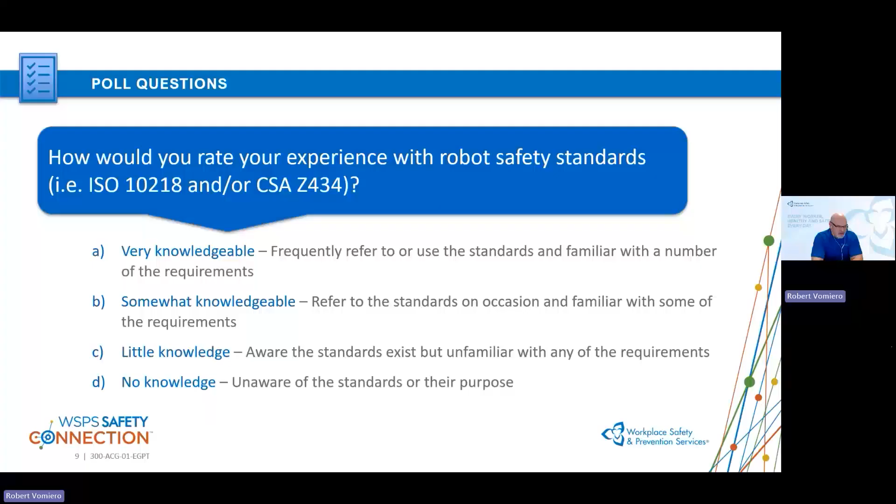So thanks for answering the poll. Most of you fall under, like I said, B. Let's go on to the next poll. To what degree is your workplace involved with robot applications that involve collaborative tasks? We're going to be talking about this topic quite a bit in this session. Okay.

Take a minute to respond, and I'm just curious to see what your exposure to collaborative applications is. Oh, wow. Okay. Quite a few of you answered A, which means you currently have a collaborative application or applications already in operation, which is great. A few of you answered B. A larger number, or almost equal, answered C and D.

So again, that's great. Collaborative applications are definitely a topic where a lot of work has gone into with respect to providing additional guidance in the new ISO 10218 parts 1 and 2, and we'll get into that. So whether you already have a collaborative application in operation, or you're thinking about it, or you're trying to decide whether a collaborative application is suitable for your process, I'm hoping what we talk about today is going to provide you with additional information to help you make those decisions and to be more comfortable with the technology. So again, thanks for answering that poll. Let's keep going.

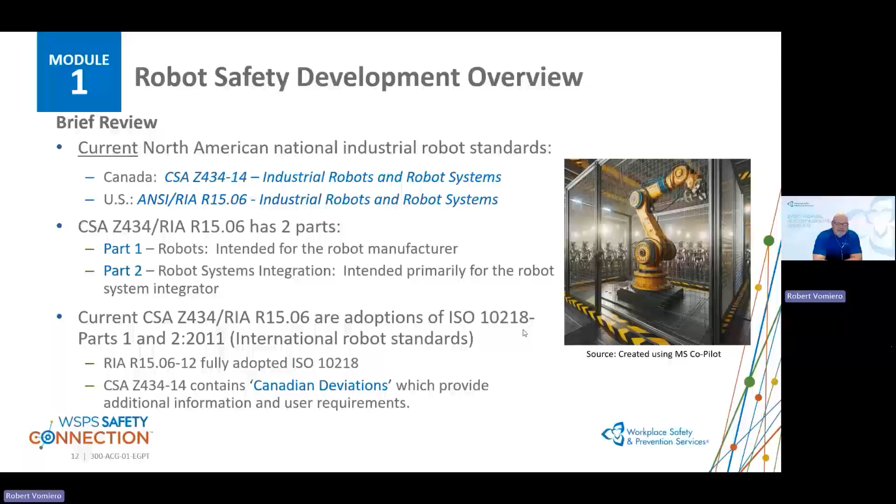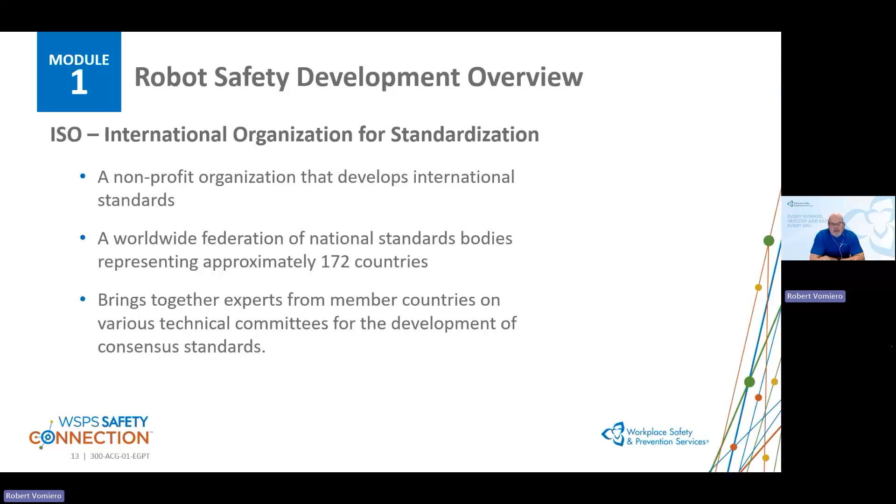So who is ISO? Some of you may be very familiar with ISO, others maybe not so much, but ISO stands for the International Organization for Standardization. They're a nonprofit organization, as are most standards development organizations. They're a worldwide federation of national standards bodies representing approximately 172 countries, and it brings together experts from all of these countries for the development of consensus standards. Why is that important? Well, the reason that's important is because ISO is made up of various technical committees.

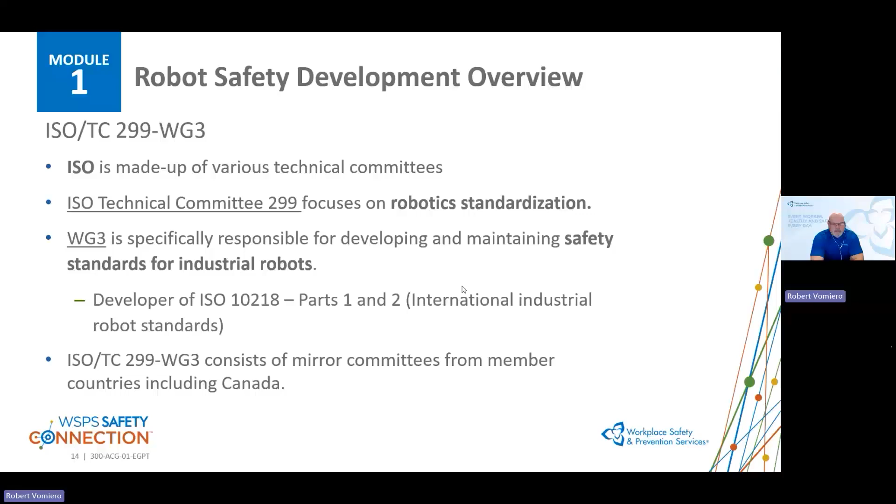ISO TC 299, Technical Committee 299, is the technical committee that focuses on robot standardization. Working Group 3, which is one of the working groups under TC 299, is specifically responsible for developing and maintaining safety standards for industrial robots. And as you probably guessed, they are the developer of ISO 10218, Parts 1 and 2. ISO TC 299 Working Group 3 consists of various mirror committees from member countries, including Canada. So again, one of the committees I'm lucky enough to be part of. Okay.

So how do Canada and other countries contribute to international standards committees? Well, in Canada, we have an organization called the Standards Council of Canada, which is a federal crown corporation, and SCC oversees our national standardization system. So some of their key roles nationally: they coordinate and oversee our national standard system, but they also accredit standards development organizations, SDOs, such as, you guessed it, CSA, the Canadian Standards Association.

Also, internationally, SCC is a member body of the International Organization for Standardization. They are also a member body of the IEC, the International Electrotechnical Commission. So these are both international standards development organizations, and the SCC is a member of both of those organizations. And this is how Canada contributes to international standards development, through the Standards Council of Canada being a member body.

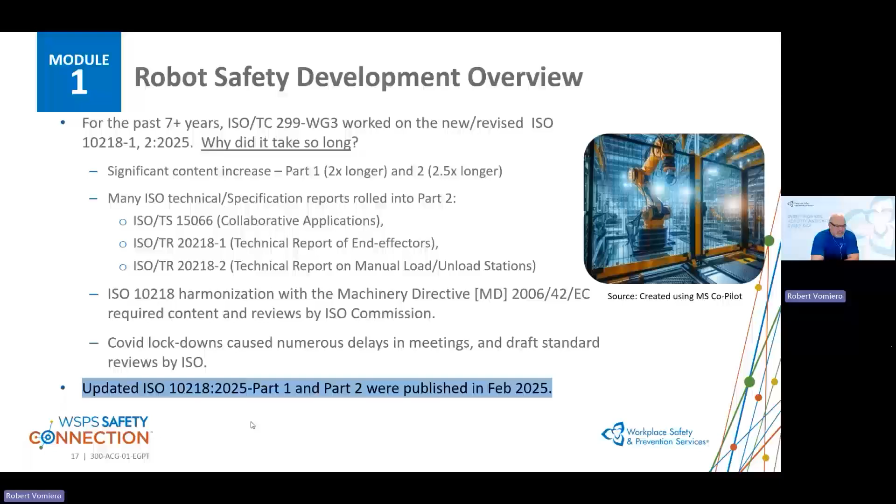And lastly, as you can probably imagine, COVID lockdowns caused numerous delays in meetings, so fewer face-to-face meetings because of lockdowns, and draft standard reviews by ISO. So all of this together really stretched out the development cycle. But after a lot of time and effort, delays, challenges, and so forth, the updated ISO 10218 2025, parts 1 and 2, and yes, they are published separately on the ISO site, were published in February 2025. And that was exciting news because we had been waiting for the publishing of this new standard for quite a long time.

So now that the new ISO 10218 1 and 2 have been published, what's next? Well, CSA Z434 and A3 R15.06 committees, which are the Canadian and US national committees that develop the Z434 and R15.06, are working to adopt the new ISO 10218 Part 1 and Part 2 for Canada and the US. So this is currently in progress. Okay, so yes, we will have a new industrial robot standard in Canada and in the US in the near future.

What are the timelines that we anticipate? The US plans, and again, this can change, to adopt and publish the new A3 R15.06 Part 1 and 2, and a new Part 3, which we'll talk about in a second, by the end of 2025. Now, please keep in mind that can change. And the Canadian plan is to adopt and publish the new CSA Z434 Part 1, 2, and the new Z434.1 sometime in the first quarter of 2026.

And a big change in the new Z434 will be that it will not contain any Canadian deviations. So the question you may have in your mind is why? Where are the deviations going? And that takes me back to the second point on this slide. Canada and the US are also working on an additional part for North America called in Canada Z434.1, and in the US it'll be simply called Part 3, which will be titled Use of Industrial Robot Cells.

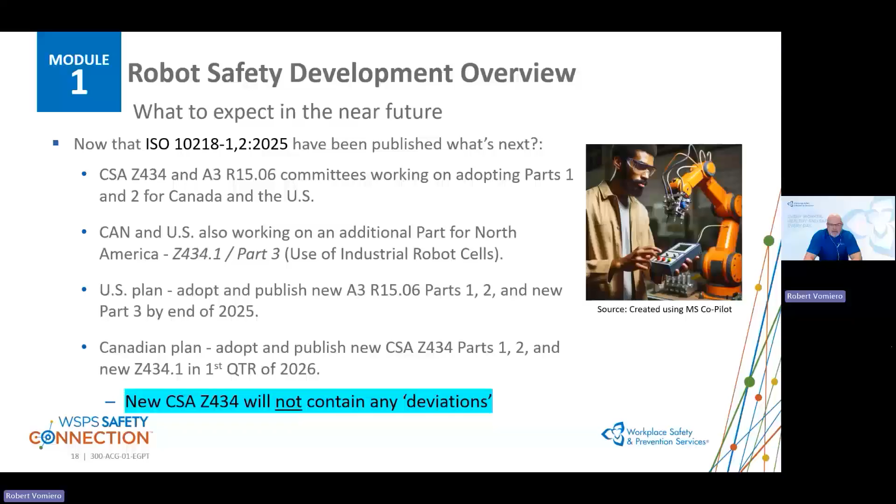So what will be the purpose of this Z434.1 or Part 3? It will be to provide requirements and guidance to the end user, which again, here in North America is very important. And I'll talk about this a little bit more in the coming slides.

So the last slide I wanted to share with you, I just wanted to give you a visual in this graphic of the development history of the evolution of the US, so the ANSI RIA, which will now be known as ANSI A3, so the development of their robot standard, the development history of the ISO 10218 standard, and the development history of the Z434 standard.

For those of you that do have experience with robot standards, you're probably aware that the ANSI RIA R15.06-1999 was a pivotal standard. I call it a launching pad for all of the subsequent standards that came along, both in the US and Canada, but with respect to ISO as well, which the arrows are supposed to signify. So again, this is just a quick visual for you, but this gives you an idea on what the history and the evolution of the robot standards was.

Okay. So Mike, I'm going to take a pause for a second. Are there any questions from anyone in the chat? I can't really see the chat really well. Don't see anything in the chat right now, Rob, so I think you're okay to keep going. Okay, great. Thank you.

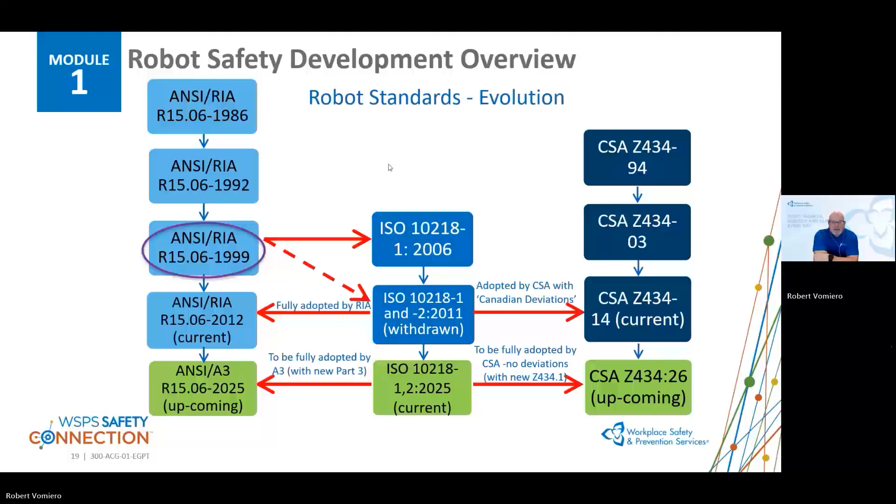So again, that's a little bit on standards development and how things work. Let's get into module 2 of our session, which I would call the nuts and bolts of this session. Let's highlight some of the changes in the new ISO 10218. So the first thing I want to clear up and make sure everyone is aware of, is that a risk assessment is still a requirement in both Part 1 and Part 2 of the new ISO 10218.

However, the new ISO 10218 has also introduced a number of prescribed requirements relating to functional safety requirements. For those of you not familiar with the term functional safety or performance requirements, that speaks to the reliability of safety functions and the safety functionality of robotic applications.

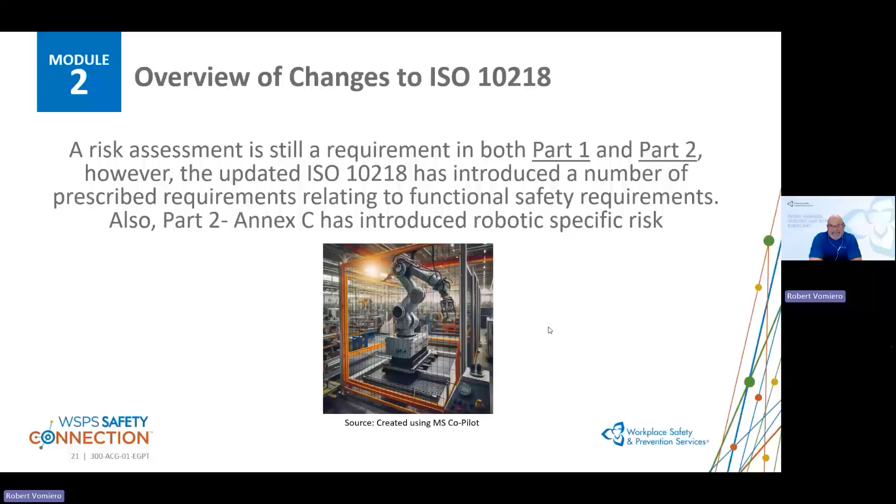So if we dig a little bit deeper into the changes in the ISO 10218, these span across both Parts 1 and 2. There are additional requirements for design, which we don't have time to get into in this session, but I jotted down one example, which is robot position holding requirements without power. So yes, there is additional guidance that has been added into the robot standard.

In particular, if that position holding is accomplished using safety functions. So there is additional guidance provided in the new ISO 10218, and because in this case we're talking about the robot itself, this is specifically in Part 1, there is additional guidance provided on the design of the robot, which is going to be of interest to the robot manufacturers out there.

Mode requirements, so automatic and manual mode for your robot and your robot applications. Again, not a topic that we have time to dig into in this session, but that is another change that you will see in the new ISO 10218. The third point is actually very significant, and we'll spend some time on this: the clarification of requirements for functional safety.

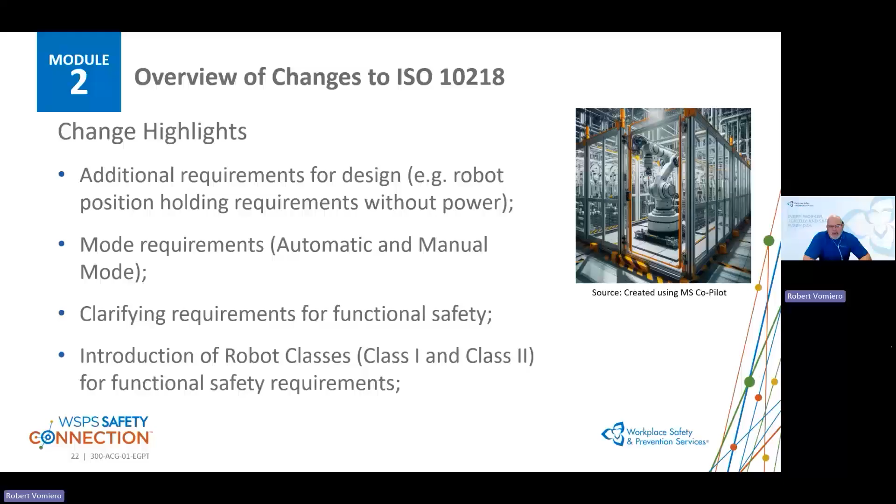So some additional change highlights. Test methodology to determine the maximum force per manipulator, or for the robot arm, for class 1 robots. And we'll talk a little bit more about that in the next few slides. As you can imagine, there are added requirements for cybersecurity in both Parts 1 and 2.

There's the third point, incorporating safety requirements for industrial robots intended for use in collaborative applications. We will spend some time on this point in today's session because this is a significant change. There has been a lot of guidance added into both part 1 and part 2 of the new ISO 10218

on collaborative applications. And then, like I mentioned a minute ago, the addition of risk assessment protocols, so risk analysis criteria specifically, has been added in part 2, which are focused specifically on robotic applications, which are going to have an impact on how risk assessments are carried out.

So let's talk a little bit about functional safety requirements. And remember, when I say robot functional safety or performance requirements, if these are terms you're not familiar with, really we're talking about the level of reliability of the safety functions for a robot application that ultimately are keeping workers safe.

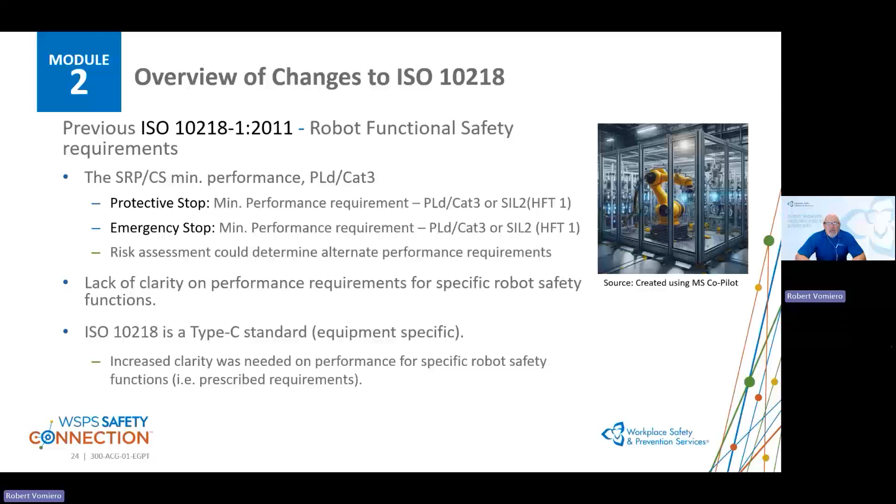Okay, so in other words, the performance requirements for robot safety functions have become more prescribed in the new ISO 10218, in particular in part 1, but to a certain extent in part 2 as well. And we'll dig into that a little bit more.

Now for class 1 robots, the listed criteria, and this is important to note, shall be the maximum capability of the manipulator without any limiting safety function. So what does that mean? That means that in order for a robot to be classified as class 1, one of the criteria it needs to meet is that none of those characteristics listed under the class 1 robot are exceeded. Those are the worst case scenario performance criteria for the robot without being limited by safety functions.

When I say safety functions, those are functions such as safety rated monitored speed, monitored standstill, position monitoring, and so forth. So again, those performance criteria listed under class 1 have to be the worst case scenario performance criteria that the robot can achieve in order to be deemed class 1.

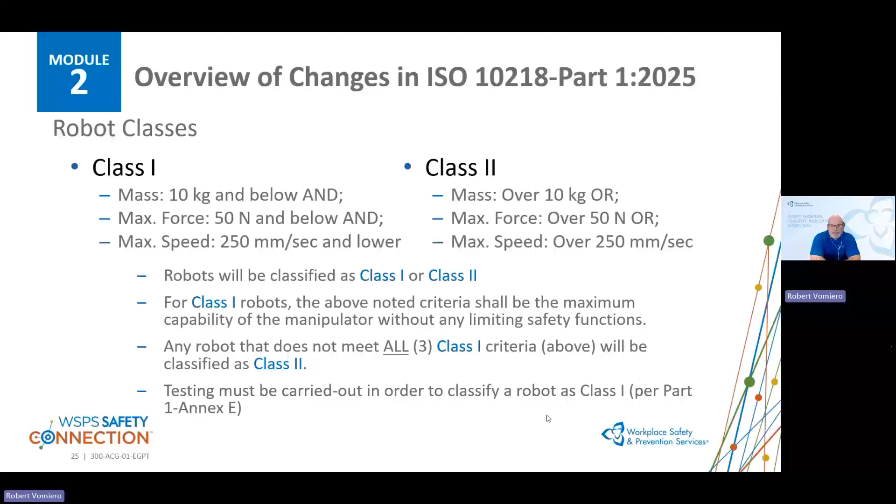Now, because class 1 robots have reduced performance capabilities and characteristics, so reduced mass, reduced speed capability, and reduced force output, as you saw in the previous slide, there is a lower functional safety performance requirement for the safety functions related to the class 1 robot. And the minimum requirement in the new ISO 10218 Part 1 is a performance level B or SIL 1.

Another interesting note about class 1 robots, if they've been classified as such, they are not required to have a 3-position enabling device, which is the control that some of you may be familiar with, that you usually find on the back of the teach pendant that enables the robot to be operated in manual mode. Now, the 3-position enabling device is not required on a class 1 robot if foreseeable robot tasks can be performed safely without an enabling device. So this will be risk assessment determined.

But it is also important to note that the robot manufacturer must provide safety inputs for the integration of an external 3-position enabling device if needed. So the safety inputs have to be there, but depending on the risk, an enabling device may not necessarily be required.

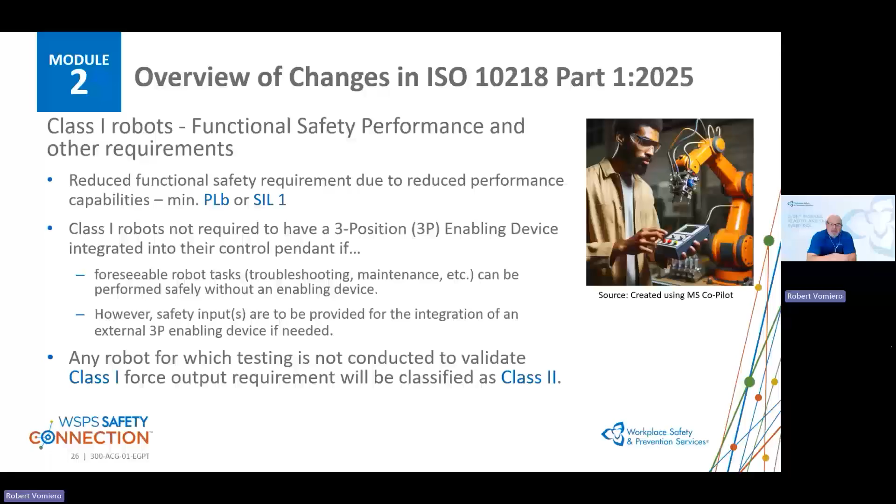And so again, any robot for which testing is not conducted to validate class 1, in particular the force output of the manipulator, will be classified as class 2. Some robot manufacturers may have smaller robots, which may or may not fall under the requirements of class 1. They may decide not to do the testing that's required. So those would be deemed class 2.

Okay, so I'll just take a quick pause. Mike, anything in the chat with regards to questions? No questions that haven't been already addressed. So I think you're good to continue, Rob. Okay. Good, thank you. I know it's a lot of information, everyone, but these are, again, all important changes.

I'm going to talk a little bit about the class 2 robot, which, as you can imagine, looking at those criteria that I showed you for both class 1 and class 2 earlier, most of the robots on the market will be class 2 robots. The minimum functional safety performance requirement for class 2 robots has different options. It can either be a performance level D category 3 per ISO 13849-1 or SIL 2 with a hardware fault tolerance of 1. I didn't include it, but that would be per the IEC 62061 functional safety standard.

Or the third point is a new criteria that the committee has added, which is either a performance level D or a SIL 2 performance with a PFH of less than or equal to 4.43 times 10 to the negative 7 per hour. What does PFH stand for? It is a term that you will find in functional safety standards that stands for probability of dangerous failures per hour. And you can see that the number is very, very small. Even not knowing anything about functional safety, which there's probably people on the call that are very comfortable with functional safety, it might be newer to others, but you can see that the value is very, very small. 4.43 times 10 to the negative 7 dangerous failures per hour.

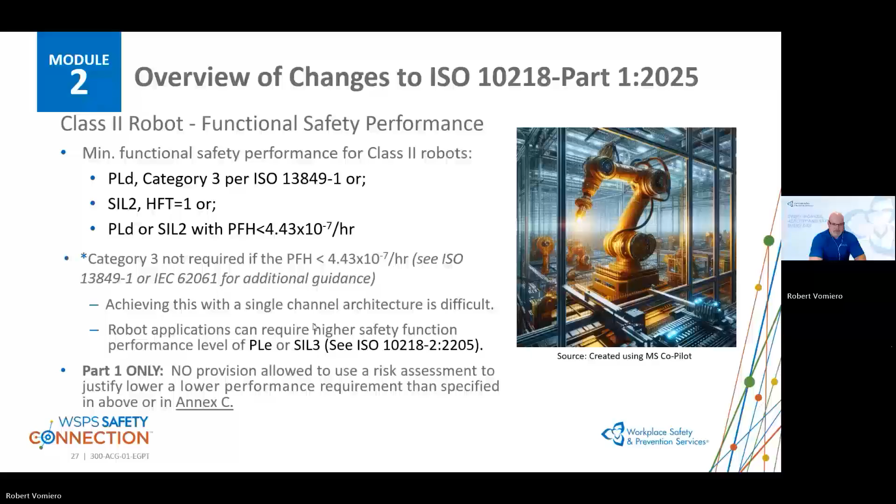Let me know, Mike, if there's any follow-up. Yep, I've got a thumbs up here.

Absolutely. Thank you. Okay. So a little bit more on functional safety for class 2 robots. I mentioned Annex C. Why is Annex C important? Part 1, Annex C, has two tables in it, Table C1 and Table C2. Table C1 lists robot safety functions that must meet the minimum performance requirement that we just talked about. So the PLd or SIL 2, again, with either category 3 or the PFH requirements.

All of those functions that must meet that requirement are listed in Table C1, which I didn't include here. But again, you'd have to look at the standard. But a couple of examples would be the interlocking function, the protective stop function, the mode activation safety function. So these are examples of some of the safety functions that have to meet that PLd or SIL 2.

However, Part 1 also has a second table, C2, which provides alternate minimum functional safety performance possibilities for specific safety functions. Things like the emergency stop, which if you look at Table C2, it'll say that the minimum requirement is a PLc SIL 1. The normal stop, which the minimum requirement is a PLb, and we'll talk about what a normal stop is in a few minutes, and the reset function. There are others, I just listed a few examples.

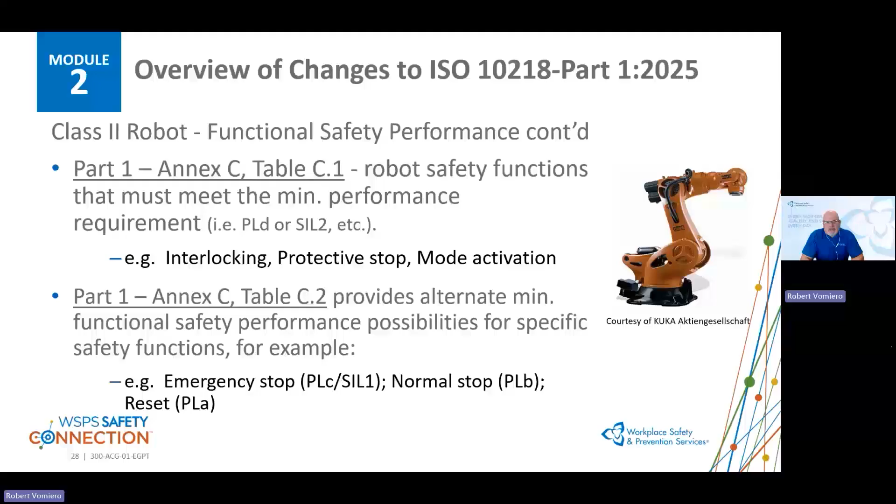So when I say that the new ISO 10218 provides more prescribed guidance on the reliability of safety functions, this is what I'm talking about: the information that's in Annex C in these two tables. And just doing a quick time check.

So now we've been talking about Part 1 with respect to functional safety requirements. What about Part 2? So functional safety performance requirements for the robot application. Similar to Part 1, the safety-related parts of the control system, which is an ISO 13849 acronym, or the safety control system, which is an IEC 62061 acronym, but it talks about the safety functionality of the overall application as opposed to just the robot. Part 2 outlines two approaches for the integrator to determine the performance of each required safety function.

Again, there's an Annex C in Part 2. You can either follow the required performance level or SIL levels listed in Annex C, Table C1 of Part 2, which lists minimum requirements for performance. However, there is a second option for the application where the performance requirement can be determined based on the results of a comprehensive risk assessment. So again, the risk assessment remains very important for the overall application.

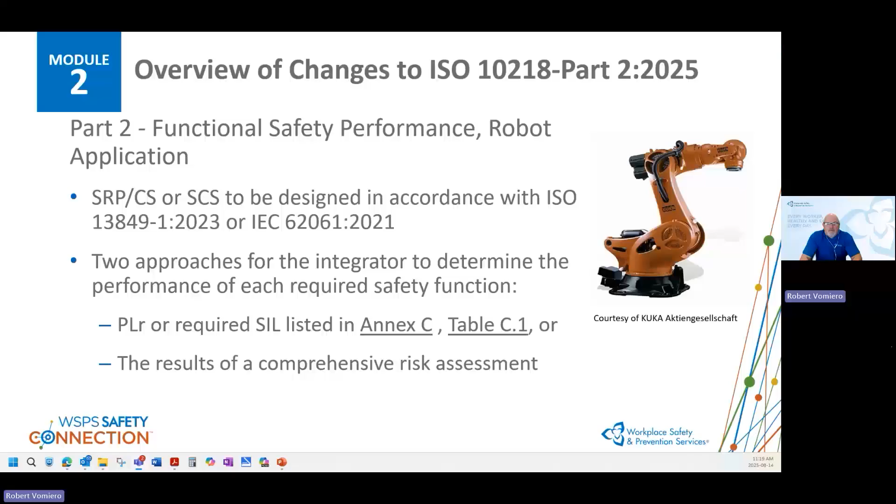And so again, I know this is a lot to digest, but it is a big topic in the new ISO 10218.

Now again, similar to Part 1, in Part 2 for the overall robot application or robot cell, if you will, where PLd or SIL 2 safety performance is required, the actual structure of the safety function remains the same as Part 1. So either you're going to have a Category 3 architecture or a hardware fault tolerance of 1, or you need to meet the probability of dangerous failures per hour criteria listed. And it stands to reason that obviously, since the robots are being integrated into cells, those requirements would align between Part 1 and Part 2.

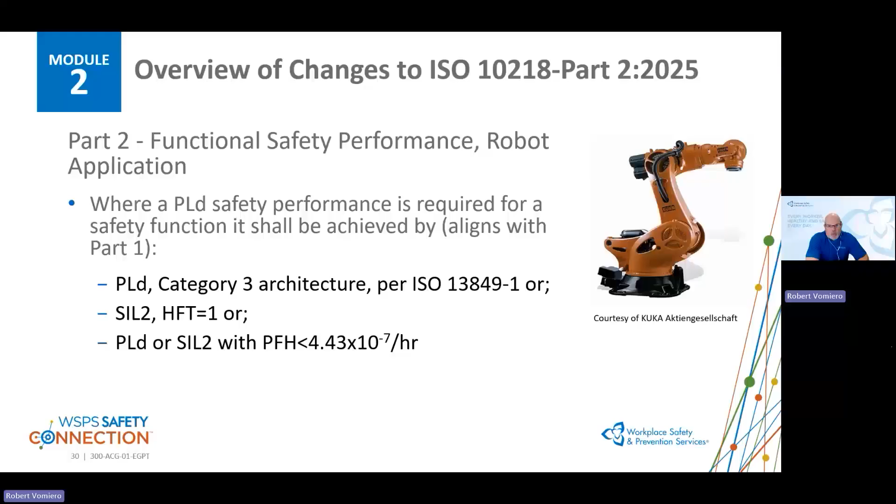Okay. So that's a tough topic. We're going to move off, at least for now, functional safety requirements. Well, we never really move off the topic, but we're going to focus a little bit in the next couple of slides on stop functions. So what's changed? In the previous version of ISO 10218-1 and 2, again, the 2011 version, robots and robot systems were required to have, as I mentioned earlier, an emergency stop function, which is a function intended to avert or reduce existing hazards, and a protective stop function, which is a function intended to stop the machine in response to a safety-related event.

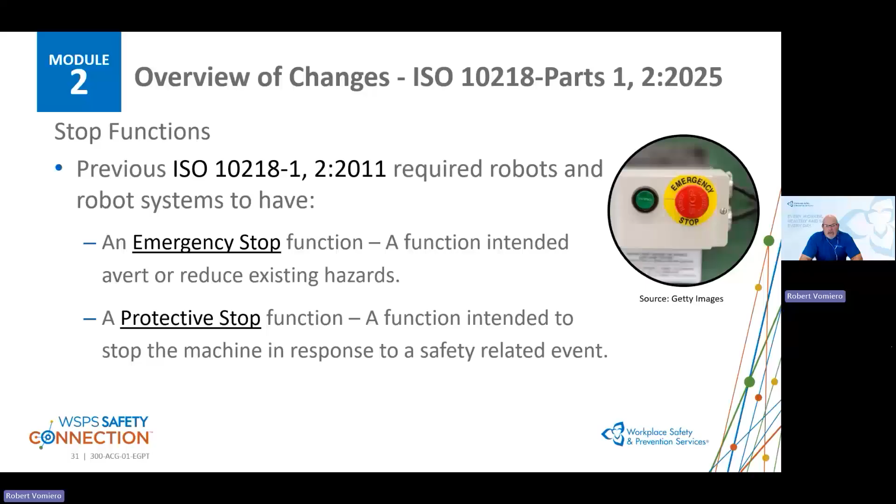So typically we would say that emergency stops would be integrated into the emergency stop inputs, and your safety devices would be integrated into the protective stop inputs of your robot system, okay? But what's changed for ISO 10218 2025? Well, there's an additional stop that's been added. There is now a requirement to have something called a normal stop function for both the robot and the robot application. And what is a normal stop?

Well, it's just another type of stop. The definition of it is a function intended to stop a machine as part of a routine operation. So for example, stopping a machine, a line, a process at the end of a shift. So again, there is now a requirement to have this normal stop function. Why was the normal stop function added? Well, one of the main reasons was to achieve harmonization with the European Union Machinery Directive. That was, like I mentioned, a key goal of TC 299 Working Group 3. And in order to achieve that harmonization, the normal stop needed to be added to the standard.

Because the normal stop function is intended as a routine operation, it has a lower performance requirement, a minimum requirement of performance level b. Just pause there for a minute.

Mike, any questions about functions? Not about stop functions, Rob, but we do have one question: would we need to update the robot systems if you reuse or redeploy older Class 2 robots and add them into a new cell? That's a good question. Yeah, and that's a rabbit hole right there, as I'm sure the attendee can imagine. So the answer to that question is longer-winded.

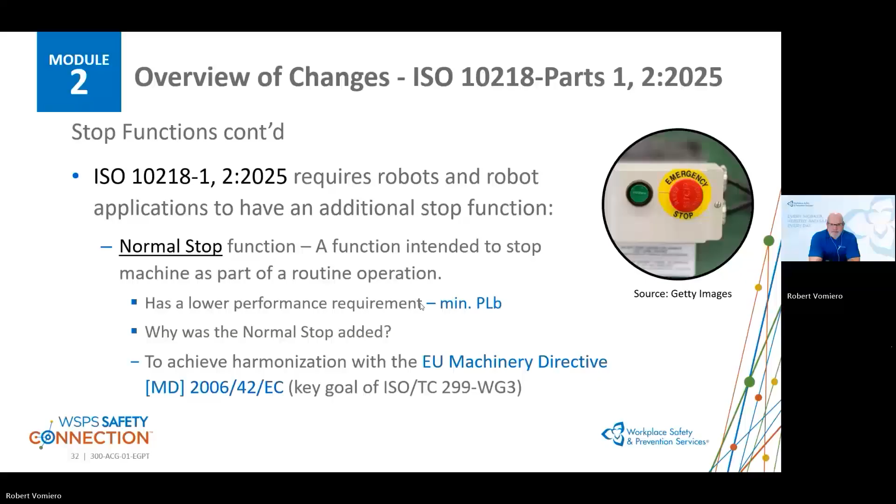Yeah, I think something like that would require a more detailed analysis based on a review of the complete system. So yeah, I think you got it there, Rob. Yeah, thanks, Mike.

Not a lot of information in this session on cybersecurity. However, it is an important element that has been added to both parts 1 and 2 of the new ISO 10218. There is a requirement both on the part of the off-the-shelf robot and the application or the cell that a cybersecurity threat assessment be conducted. And the outcome of that should result in cybersecurity measures for threats related to safety risks.

So think about systems that are operating over a network and risks related to hacking and taking control of equipment and so forth. So again, cybersecurity measures for these types of threats would need to be put in place. So of course, some of the things that the standard points to is preventing unauthorized access to the robot control system, plus its hardware, software, application software, and related configuration data. So pretty broad.

The standard doesn't provide a ton of information on this, but it does point us to 2 important standards. The IEC Technical Spec TS 63074-2023 for functional safety requirements related to security, network, and cybersecurity measures. As well as the security risk assessment for system design, IEC 62443-3-2-2020. So for those of you that are involved, IT departments and so forth, that are going to be setting up things like firewalls and other cybersecurity measures, these are 2 important international standards that the new ISO 10218 points us to.

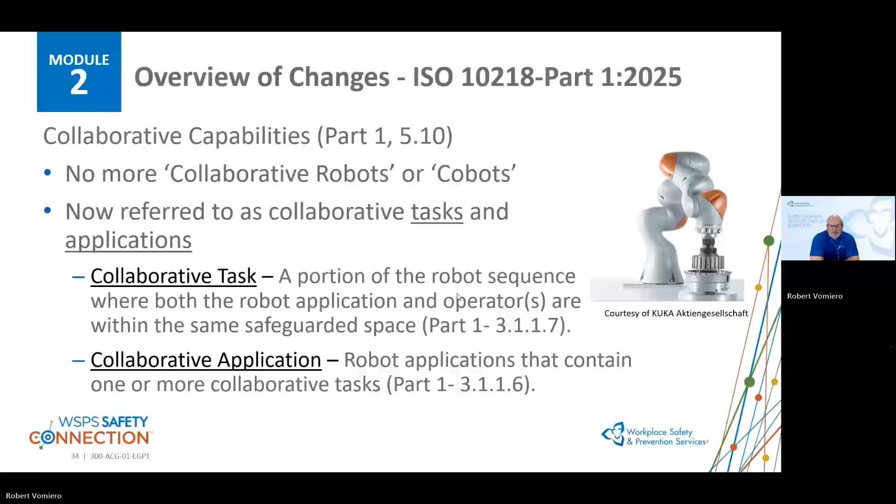Now, for those of you that are more familiar with the previous version of ISO 10218 and our CSA Z434 standard, there was another what was referred to as type of collaboration that was listed, which is really a misnomer now. We used to also list safety rated monitored stop as a type of collaborative operation. Well, you're going to notice in the new ISO 10218 in both parts 1 and part 2 that safety rated monitored stop is no longer listed as a collaborative capability, or as a safety function that allows collaborative applications.

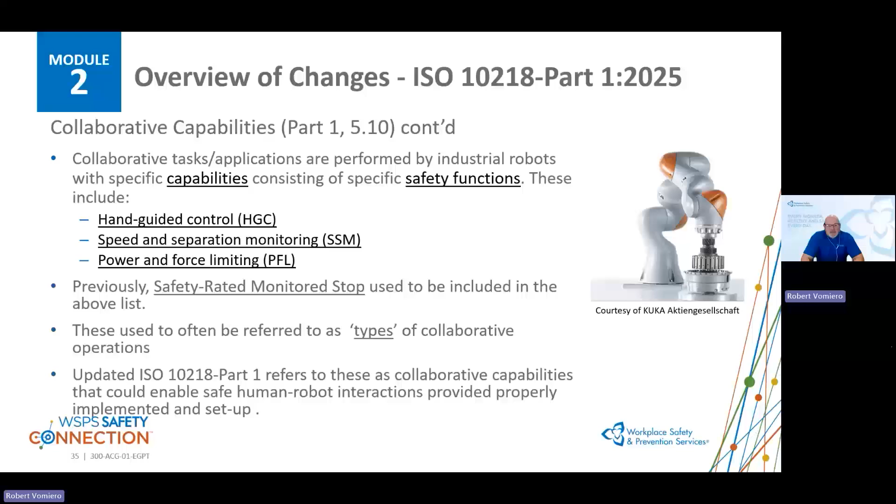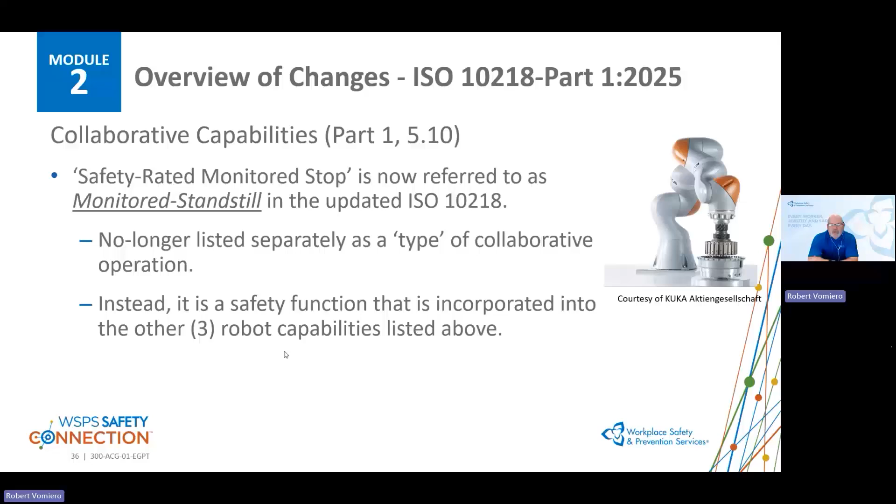Okay, and the reason for that, which takes us to the next slide, is that safety rated monitored stop, first of all, is now referred to in the new standard as monitored standstill, and it's no longer listed separately as a type, using air quotes here, of collaborative operation, because it is actually integrated into the other 3 types. So monitored standstill is one of the safety functions that is implemented into hand-guided control, speed and separation monitoring, and power and force limiting. So it's no longer called out as a separate type of collaborative operation, but it does still exist, and it is still incorporated into the other collaborative capabilities. Okay. You'll find this information in part 1, clause 5.10 of the new ISO 10218 standard.

So let's talk a little bit more about collaborative applications. Part two provides guidance on risk reduction considerations for the overall collaborative application, not just the robot like part one does. So the risk assessment is key. I mentioned right at the beginning that risk assessments are still required for the robot and the robot application. Well, the risk assessment is key for collaborative applications to determine measures to prevent what we refer to as quasi-static contact events, which are crushing hazards, and transient contact events, which are impact hazards. So again, it becomes very important, and we're going to talk a little bit more about that.

One thing we really need to look at is contact exposure to sensitive body regions, including the skull, forehead, larynx, eyes, ears, or face, which needs to be avoided. And if risk reduction cannot be practically achieved, then yes, you may have to add guards or protective devices to your collaborative application. And we need to be very careful because, and I'm going to come back to this, not always, but in some cases, what WSPS is seeing when we go out to workplaces is that there's a misconception that because a robot is deemed collaborative or sold as a collaborative robot, the application can have reduced safeguards, or in some cases, no safeguards implemented whatsoever.

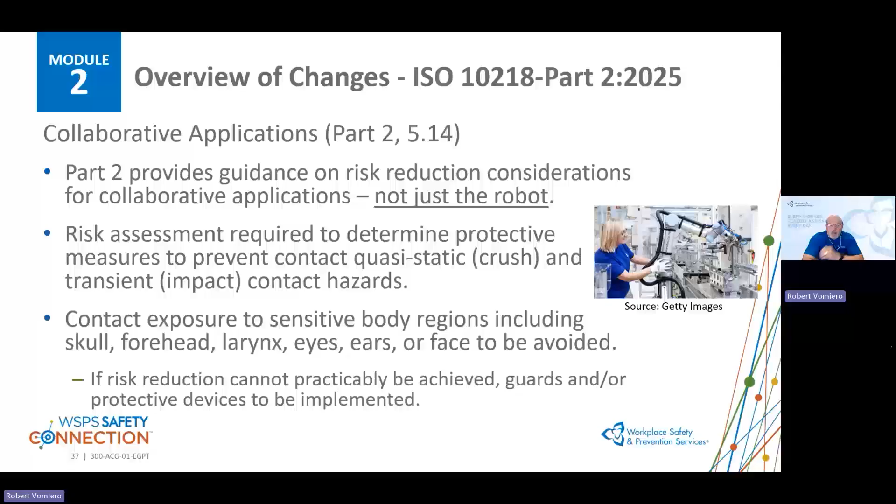So some things just to keep in mind that Part 2 is advising and providing guidance on. I mentioned that the safeguarded space can consist of both collaborative and non-collaborative tasks. Transitions, so those transition points between collaborative tasks using different collaborative capabilities like hand-guided control, speed and separation monitoring, and power and force limiting, which we took a brief look at a minute ago, or combinations of these collaborative capabilities, because yes, you can have applications that combine these collaborative capabilities. These transition areas become particularly critical.

Some of the things that the risk assessment should be considering and looking for when developing their risk reduction or safeguarding strategy include the following. So making sure appropriate safeguards and safety functions are implemented to maintain separation between non-collaborative and collaborative task areas. So what am I saying here? You could have a robot cell which has a safeguarded space, and within that safeguarded space, you could have areas where it acts as a traditional robot cell, where you need to have complete separation between the human and the hazards. But you could also have collaborative task areas where the human can interact with the robot. You're going to have transition zones from collaborative to non-collaborative task areas, and these need to be appropriately safeguarded to maintain the appropriate separation.

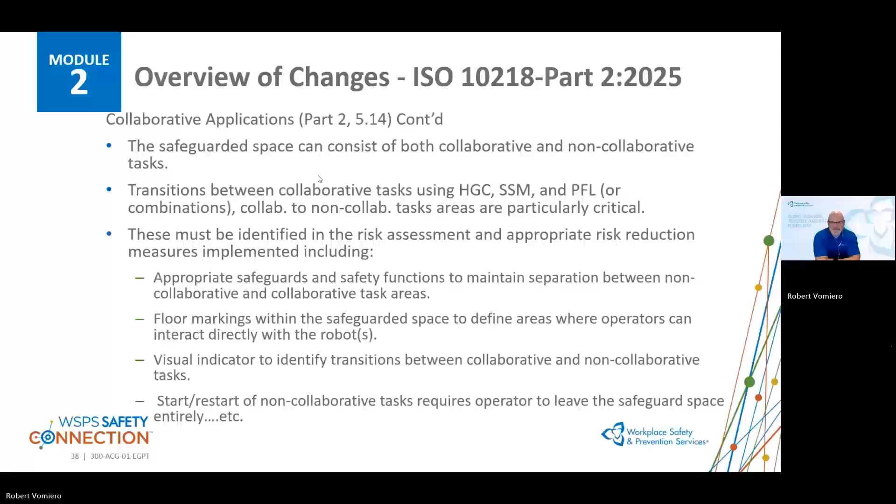So some additional changes in Part 2 of the new ISO 10218 is really excellent guidance. The addition of Annex M, which provides biomechanical force and pressure limits for different regions of the body. So again, for those power and force limiting collaborative applications where there are what we call contact events, where the human and the robot can come into contact with each other, there is guidance provided in Annex M on those force and pressure limits that need to be maintained in order for the application to remain low risk.

And I just want to point out, just on the side, we've talked about these even with respect to the previous robot standard, even though it was a separate document. It used to be an ISO technical spec. It still exists. ISO TS 15066 is a technical specification which you can obtain separately. But the nice thing about Annex M is it pulls that information into the robot standard, and those limits are based on testing on different regions of the body that result in the onset of pain. And so these values are actually tested. So we're not talking about injury. We're not even talking about any bruising or any kind of other hazard or damage to the soft tissue. We're talking about very low forces and pressures that need to be maintained in order for the application, if it's a PFL application, to remain at low risk.

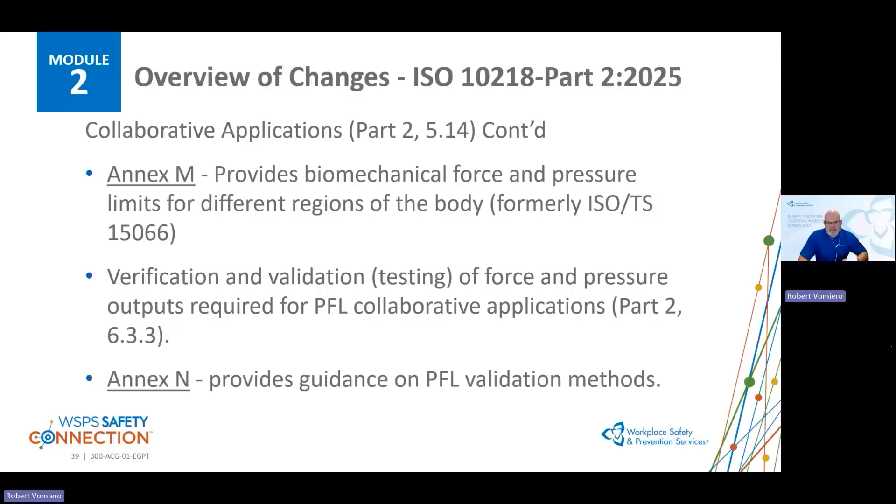But I definitely know that new values and improved biomechanical limit documents are being worked on. When we'll see those, I don't know, it could be a couple of years, I'm not sure. But again, that is in the works. Great, thanks, Rob. Okay.

So again, just to recap, I've mentioned this already, I'm not going to beleaguer it, but just be careful. There's a lot of misconceptions in the field about collaborative applications. One, the misconception that a collaborative robot is inherently safe. The answer to that is no. It is not inherently safe. It needs to be implemented and correctly set up, including appropriate validation, especially for power and force limiting applications where there's contact, to make sure that those contact events remain low risk.

And number two, as a result of number one, we're seeing a number of collaborative applications with insufficient or inappropriate safeguarding, which becomes a problem because now we're not compliant even with the minimum requirements of legislation. So, without beleaguering it, just be prepared when enforcement officers come into your workplaces. They may be asking you these questions because they enforce legislation.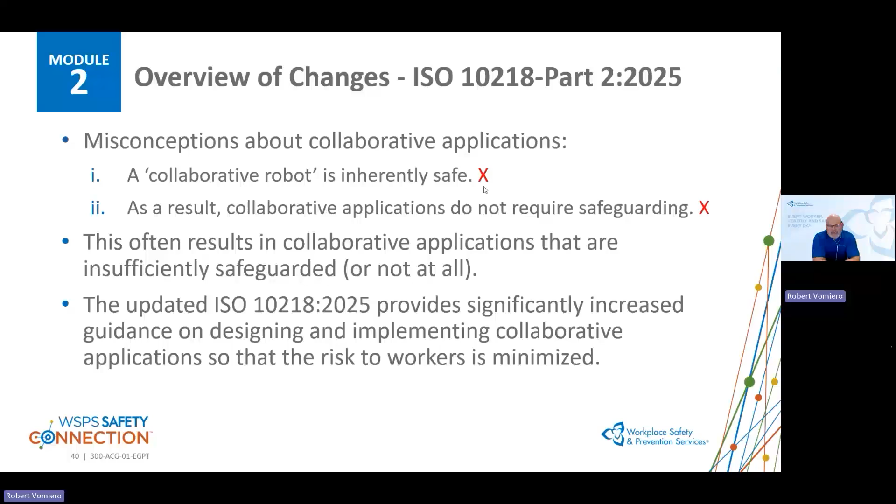So please keep in mind that just because you're using a collaborative robot, it doesn't necessarily mean it's safe or that it's been set up with the appropriate risk reduction in mind. And we do have that significant additional guidance in the new ISO 10218, which will eventually be our Z434, for making sure our collaborative applications are safe or really expose workers to minimal risks.

So I really encourage you. Sometimes annexes can be an afterthought. In some cases, definitely with this standard, you shouldn't think of them that way. They really provide a lot of important guidance with respect to the implementation of part 2. And actually, for that matter, part 1. I haven't listed the part 1 annexes, just in the interest of length, but there's certainly more annexes in part 2, which is part of the reason why it's so much longer.

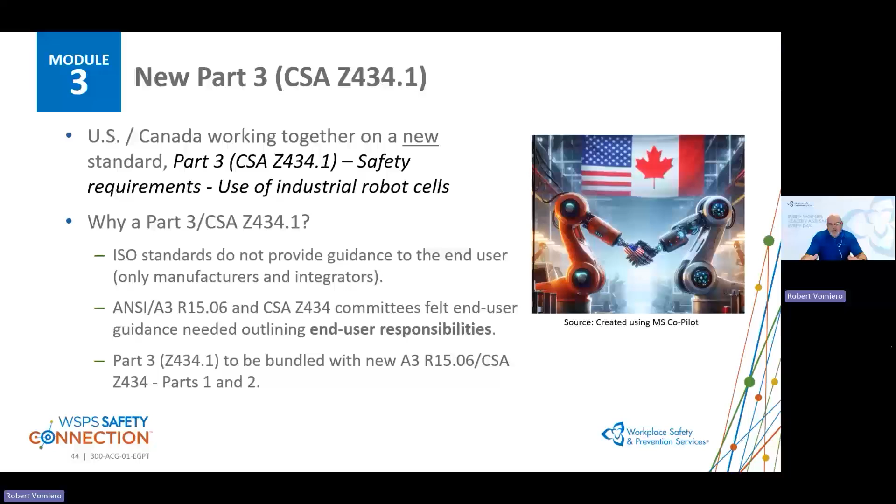So again, I talked about timelines a bit earlier. The end of this year for the US and first quarter of next year for publishing, hopefully, for Canada. But again, Part 3, as well as CSA Z434.1, will be bundled with the new Part 1 and Part 2 of our respective standards in the US and Canada. So all three of these standards will be bundled together, okay?

What will Z434.1 cover? Just some quick topics without getting into too much detail. Design considerations for collaborative and non-collaborative applications. Interaction with integrators.

User guidance on preparing a statement of work, right? Which both committees felt could be very helpful, especially for those with less experience with robotic applications. Robotic application acceptance guidance: what are some of the things the end user should be considering before they accept a new application or robot cell into their facility?

Implementation of the information for use by the integrator. So user risk reduction responsibilities and guidance on how to implement what we refer to as the information for use of the application or the cell, which the integrator and the robot manufacturer, for that matter, are required to provide. So again, how does that get implemented? Well, there's guidance provided on that in the new Z434.1.

Training requirements, which is key, especially when it comes to collaborative applications. So user training guidance and requirements. Risk assessment: what are the user responsibilities with respect to risk assessments? Risk assessment support by the end user for the integrator. Risk assessment documentation. The risk assessment process. What does the end user need to know? And guidance on methodologies for performing risk assessments.